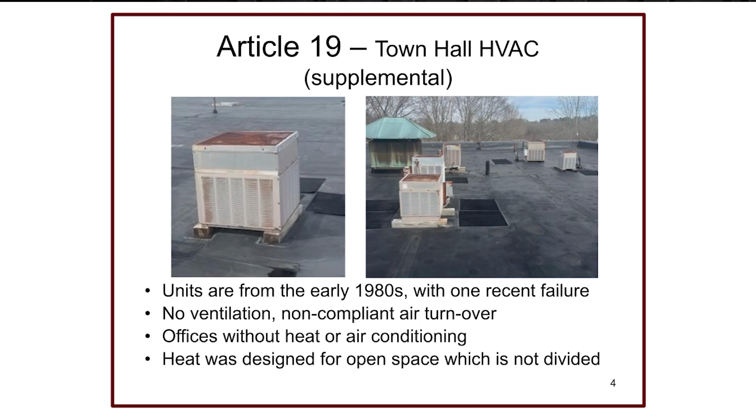So this article will supplement the prior articles to aid in the funding of the full HVAC replacement project at Town Hall. Next article is for roadway improvements and maintenance, requesting $300,000. This is a repeat article, a reoccurring article. We have this every year on the capital plan. The funds supplement other funding sources in order for us to achieve the $1.1 million we need annually to maintain

our roadway conditions. Every other year we do a townwide pavement condition, which results in a pavement condition index. Currently our roadway grades are approximately a C, a 74 across the entire town. We need the $1.1 million to maintain that pavement condition index. The other 2 funding sources are $300,000 out of the operating budget and $500,000 from the state through the Chapter

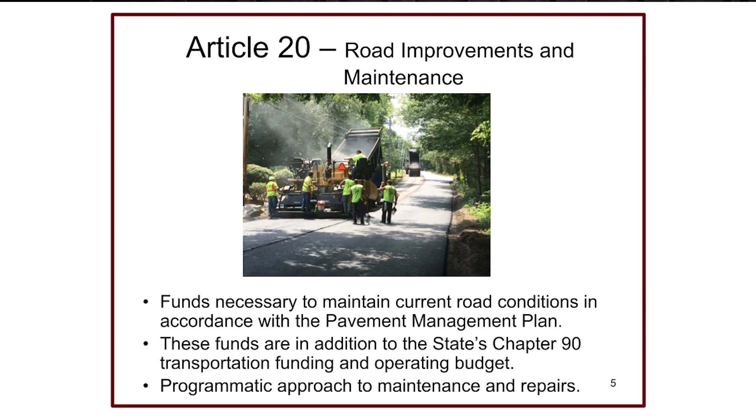90 program. Our next request is for drainage and sidewalk improvements, $300,000. We currently have no funding in the operating budget to do drainage and sidewalk improvements. We can do repairs and emergency repairs, but there's nothing for actual improvements. We have over 75 culverts and nearly 300 drainage outlets. All of these require periodic repair. We've had multiple culvert failures recently.

The one on Lincoln Street over by Lincoln Street Elementary School. There's one on Church Street that currently needs repair by Fay Lane. And there's another one on Howard Street between the cemetery entry points that requires repair. In addition, we have many sidewalks through our neighborhoods that are in need of repair. And again, we have no funding structure to do these infrastructure improvements.

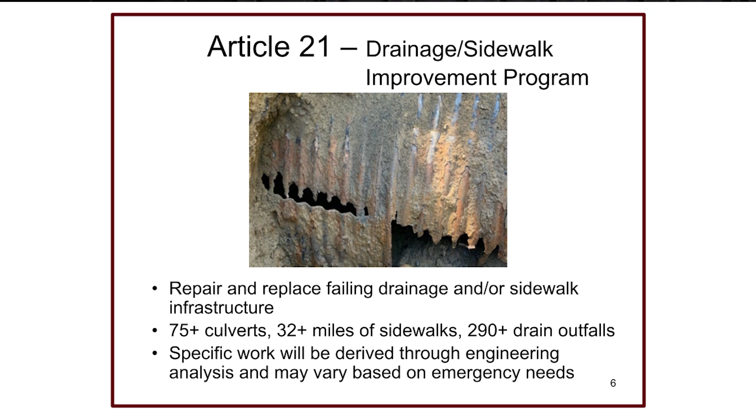This article requests funding to replace a 20-ton dump truck in the amount of $360,000. The current dump truck we have will be 22 years old at the time of replacement, and it suffers from frame rot and engine blow-by. The result of engine blow-by is a loss of power, and it's a continuing growth of loss. Eventually, the truck won't have enough power to push snow or move materials. That results in a pretty substantial safety issue for the operator.

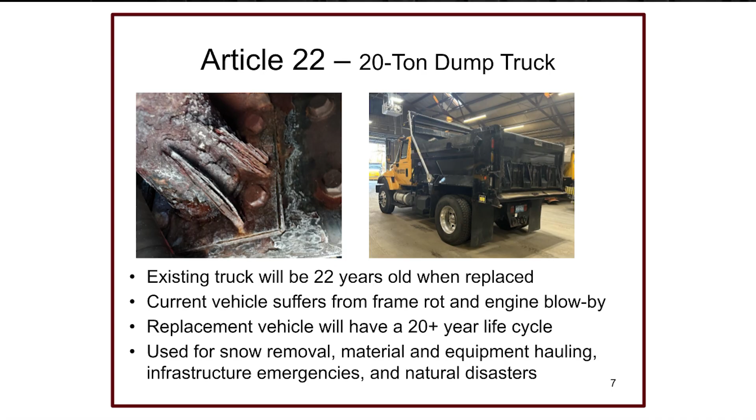These vehicles have approximately a 20-year service life and are used for snow removal around town, hauling of construction materials, and responding to emergency needs when they arise. Next article proposes to replace a 1-ton pickup truck for $95,000. It'll be replacing a 2012 model, which will be 14 years old at the time of replacement. The current truck that's being replaced suffers from bed rail rot as well as fender and rocker panel rot.

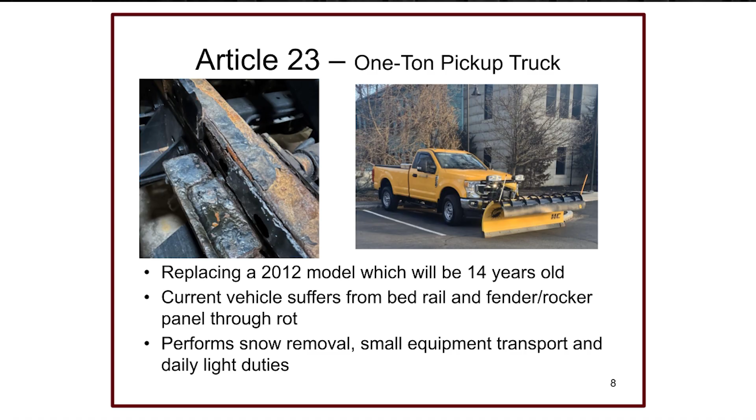These trucks are one of our primary service vehicles for some of the smaller tasks, like mowing of the town grounds, as well as trash removal. The new truck will be allocated to the superintendent, and that truck will be reappropriated to another service in the department. The next article proposes to replace a 1-ton truck with hotbox for $260,000.

The truck that previously served this purpose had an engine failure in 2024, and as a result, we inspected the hotbox, which found the chamber to be deteriorated and the diesel-fired engine to warrant replacing. The trade-in value for that truck was only $5,500, which shows what value it actually had.

The proposed truck will purchase a new chassis. That chassis will be outfitted with a dump body, and one of the older trucks in the fleet will be repurposed to accommodate the hot box.

Hot box is a piece of equipment that sits in the bed of a truck or on the frame of a truck that keeps asphalt hot, so we can do cold patching in the winter, and the cold patch is actually quite warm. And in the summertime, when we're doing roadway repairs, the hot box keeps the asphalt pliable for use.

We repurpose an older vehicle to put the hot box on it just because of how dirty of a job it is. We wouldn't want to purchase a brand new truck and allocate it to that kind of work. So one of our practices in Public Works is to repurpose older vehicles and cycle them through use.

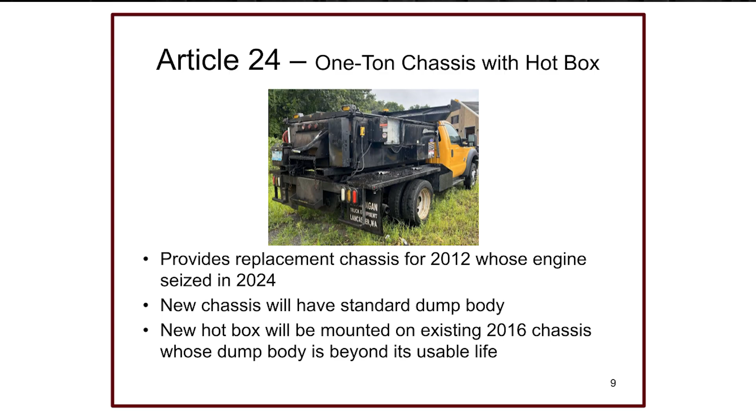This article requests $100,000 to support engineering services associated with the Assabet Hill neighborhood drainage and roadway repairs. In 2019, this neighborhood suffered several sinkholes. After the third sinkhole appeared, the decision was made to do a video inspection of all the drainage pipes and manholes in the neighborhood. The result was we found systemic failures in a lot of locations which warrant replacement.

Over the past several years, we've been planning to implement these repairs, but unfortunately, more urgent needs arose, such as the Lincoln Street culvert failure, the Davis Ave culvert failure, and several other culvert failures that needed to be addressed.

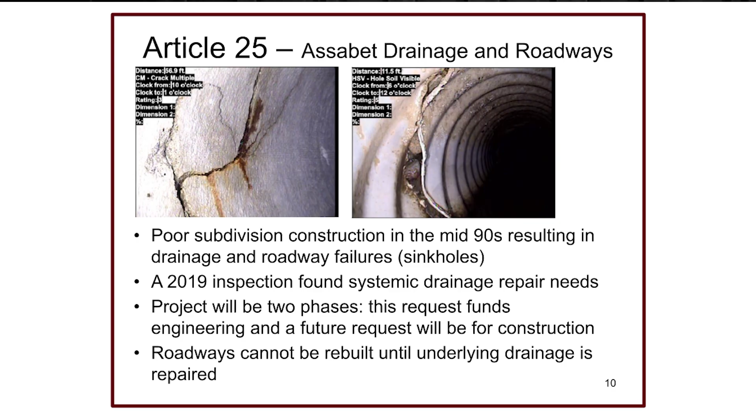The design services here will support plans, specifications, and an estimate, so that next year's capital request for construction funding can be made at that point, and hopefully if funding is approved, this neighborhood can have all of its drainage repaired so that the roadways can finally be fixed. The roadways and sidewalks are in dire need of reconstruction.

This next article is a Water and Sewer Enterprise Fund article. It has no impact on taxes nor general fund free cash. It requests a replacement 1-ton pickup truck, very similar to the prior article that was discussed. This truck will be funded 60% through the Water Enterprise Fund and 40% through the Sewer Enterprise Fund. It's a direct replacement of a 2015 pickup truck.

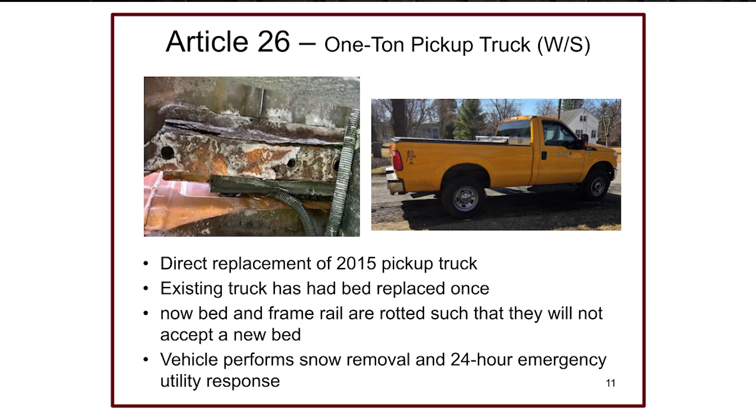The bed on the current pickup truck has already been replaced once, and the bed area right now has bed and frame rot, as well as wheel opening rot, and will not accept replacement of the bed again due to that rot. This vehicle performs snow removal and is a 24-hour emergency response vehicle for the water and sewer operations. That request is in the amount of $95,000.

This next article is to replace 2 water utility bridges. It'll be funded through debt paid back 100% by the Water Enterprise Fund. These 2 bridges are located on Otis Street and on School Street. The Otis Street Bridge crosses over by Smith Pond. The carrying beams on that one have full rot all the way through, so you can put your hand right through the beam. That water bridge is critical to services across it.

So Walmart, all of Lawrence Street and Otis Street are dependent on water service through that water main. In the event that bridge was to fail, all of those customers would be without water until service can be restored. The School Street Bridge crosses over the Assabet River. It's between Brigham Street and the Juniper Brook neighborhood.

That utility bridge was found to be in poor condition by a state DOT inspection. The sidewalk above it has been closed due to the same reason. The support beams on that one suffer from a similar condition where they've rotted through on the web of the beam. That's the vertical portion of it, and it warrants full replacement.

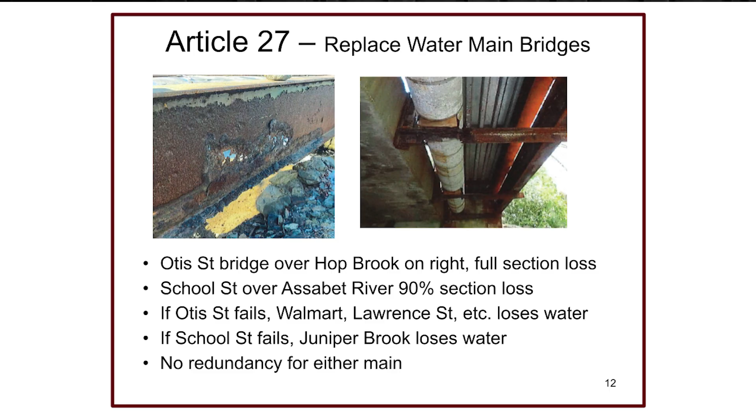Very similar to the Otis Street Bridge, the Juniper Brook neighborhood is solely dependent upon that water main. If that water main was to fail, the Juniper Brook residential neighborhood would go without safe drinking water. Again, this article requests $650,000. That'll be 100% supported by the Water Enterprise Fund.